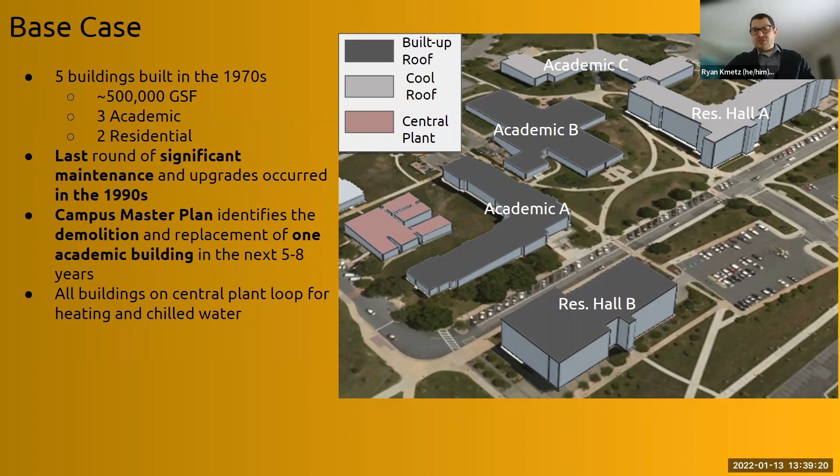All the buildings in this example are on your central plant loop for heating and chilled water. For those who don't understand what that means, the central plant has all the boilers and the giant chillers and just puts out pipes. They make a big circle and the pipes stop at every single building. That's a very simplified way to describe it.

This is where some of the sustainability folks sometimes are like, oh, I don't want to listen to this, but I'm trying to get it so that everyone kind of understands it. I understand that not all sustainability people are engineers and technically minded, but it helps if you have a little bit of interest, or at least feign some, in what the technical engineers and architects are talking about. For this example, each building has 2 air handlers per floor.

VAVs - if you are just starting in sustainability, VAV is variable air volume, it's a way you manage your HVAC. Hot water reheat is once again an HVAC term. Look these things up, it's good to get to know what they mean, so that when you're in a meeting and you hear 'oh, we installed new VAVs,' you're not like, what?

Interior lighting, I have mostly Super T8s - those are the tube lights, they're fluorescents. Back in the late 90s, early aughts, everything was moving from T12s to T8s or Super T8s, and then they went to T5s. Now today you see a lot of folks installing LEDs. Exterior lighting or metal halides, if you don't know what that is, they're usually pretty big light bulbs, usually what you'll see in a parking lot at night.

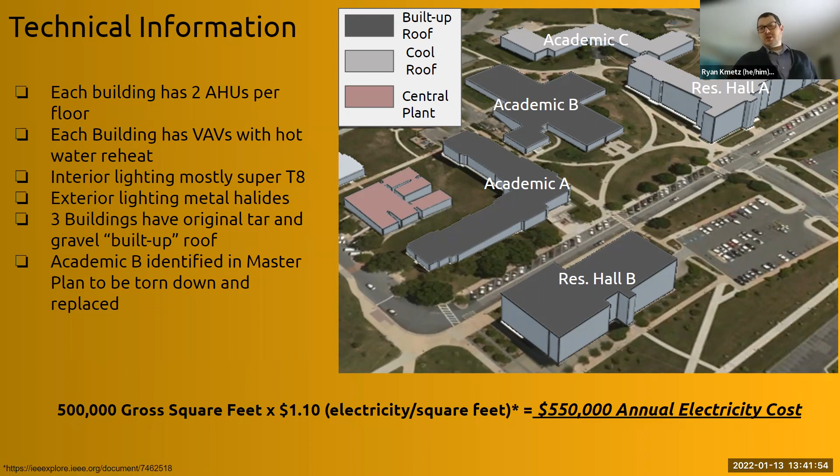Just so we have a general idea of what we're talking about, remember 500,000 square feet at approximately $1.10 for your electricity. So your annual electricity cost is just over $500,000. And you'll see why that's important.

So the EIA is the Energy Information Administration. Every so often — I think it's actually due this year, the update, every 10 years — they will do a national assessment to profile buildings.

Since the majority of folks on this call are coming from universities, we're in the commercial building sector, not residential. EIA broke down in 2012 exactly where energy is going at buildings. What's really important to take away is 25% of your typical building's energy consumption is actually coming from space heating. Lighting in 2012 was 10%. My guess is if we did this today, lighting would be closer to 7 or 8%, just because LEDs have become so adopted since then.

But you'll notice you have ventilation, cooling, refrigeration — all of these things are systems either within the building or in your plant that there might be some opportunities to discover some low-hanging fruit to increase efficiency.

So if you're a newer sustainability person on the call, you're probably thinking, what does that matter? Well, if we can measure what we're using and use it as efficiently as possible, we're going to use less energy, and less energy hopefully translates to less emissions — unless you do something crazy and turn your lights on 24/7. But what we're trying to do is think in a system and think of cause and effect and how it's going to relate.

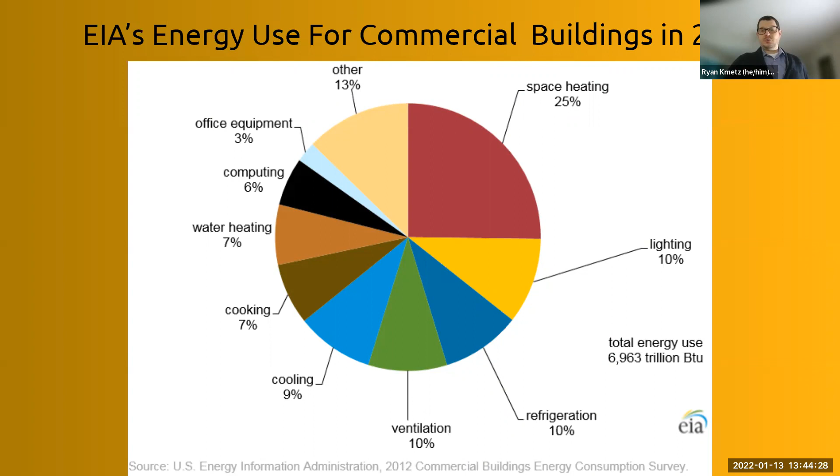So deferred maintenance — I'm sure most people on the call have heard about it. To put it very simply, it's money that you didn't spend and you put off fixing something. I won't read the definitions to everybody, but in the facilities world there's the APPA organization, and all the facilities folks will be very familiar with APPA.

And in sustainability, as everybody on the call knows, there's lots of different resources there. I actually pulled that definition out of the U.S. Geological Survey's federal manual for deferred maintenance, and I just wanted to illustrate what it is.

So you'll see on the top picture, there's two windows — just before and after shots. You'll see the one window is probably single pane glass, definitely a wood sash around it. The paint's peeling. Unfortunately the picture's not too good, but if it has like alligator scales on it, it's lead paint.

And then you'll see on the after picture, you have a nice brand new window. It's probably vinyl — I bet you it's double paned, or if efficiency is a really important thing at that institution, it's triple paned. And the glass also has something called an emissivity factor, so you might have heard of a low E window. So you went from windows that probably didn't have that to windows that now do.

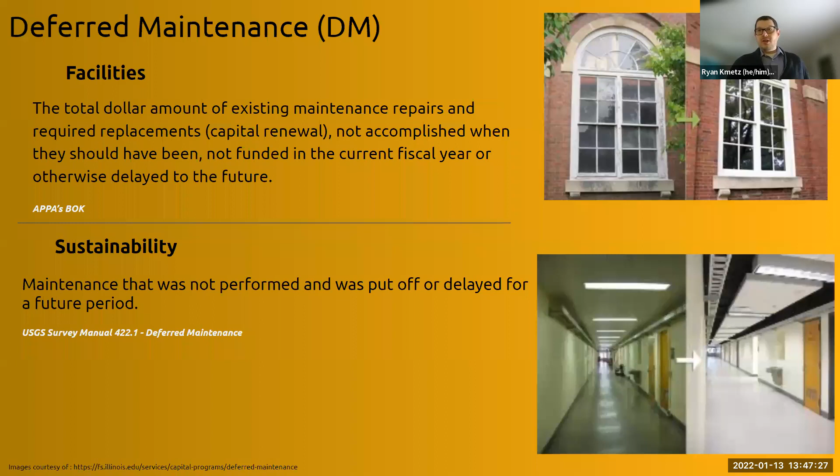So when we talk about deferred maintenance, it's typically stuff that isn't a disaster if it doesn't get fixed, but needs to eventually be fixed. Lots of times you think of the building envelope, so your windows, your doors, or even pipes coming in and out of buildings, usually with little gaskets or foam around them. That stuff breaks down over time.

Roofing systems, it's going to depend on how long. Different roof types have different life cycles. Everybody's familiar with house shingles - your average house shingle, an asphalt shingle, is about 20 to 25 years. But for those who grew up in the Midwest or more rural areas, you probably know houses with metal roofs, and those are typically 50 to 75 years. Then you can go to Europe to the extreme - clay roofs, which in some cases were put up in the 1600s and are still there today, functioning just the way they should.

For HVAC, that's your fans, your pumps, your sensors, and then lighting - it's fixtures, just where you put the light bulb, and controls can be as simple as a light switch or as complex as a controller that will dim the lights to a certain level at a certain time, depending on if it feels or sees somebody's motion.

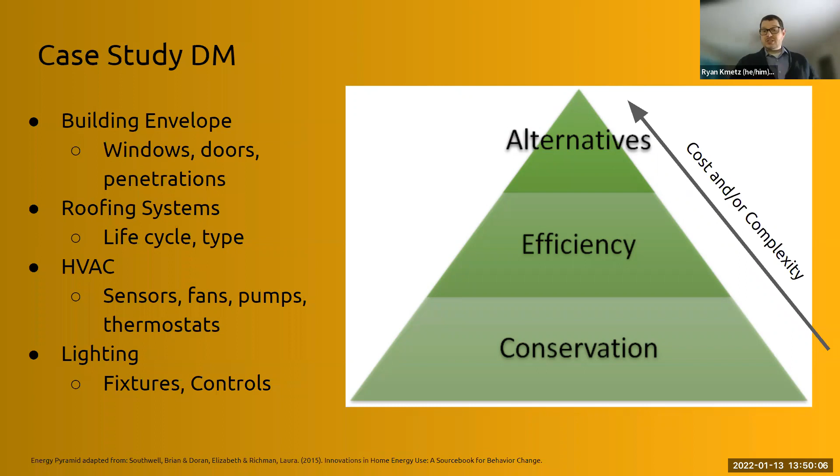So once again, back to our cool little example here - what I want to do is show everybody some projects that every campus deals with on a regular basis. ECM is an energy conservation measure, and roof replacement really isn't an ECM, but it just made the chart look nicer. The X's indicate some of the examples here - our X's mean that we did it. In this case, we did 4 buildings with LED retrofits.

Once again, this is fictitious - 4 buildings with HVAC. Only the residential buildings got building envelope treatment, and roof replacement was needed on 2 of the buildings. Then I extrapolated out total costs, based on kind of national averages, and the savings. As you can see, the LEDs pay for themselves really fast, whereas stuff like roof replacement doesn't pay for itself super fast, but it's usually something that's needed. Envelope is almost always going to be a loser, just because it's a slow payback.

But in some cases, like the lead paint example, you're able to remove an environmental hazard and make it look better. And if they're your flagship res halls, that's very important when you have students and their families touring through. So I just wanted to give that example. And you're probably like, why is the one building, building B, nothing in academic building B, nothing's happening?

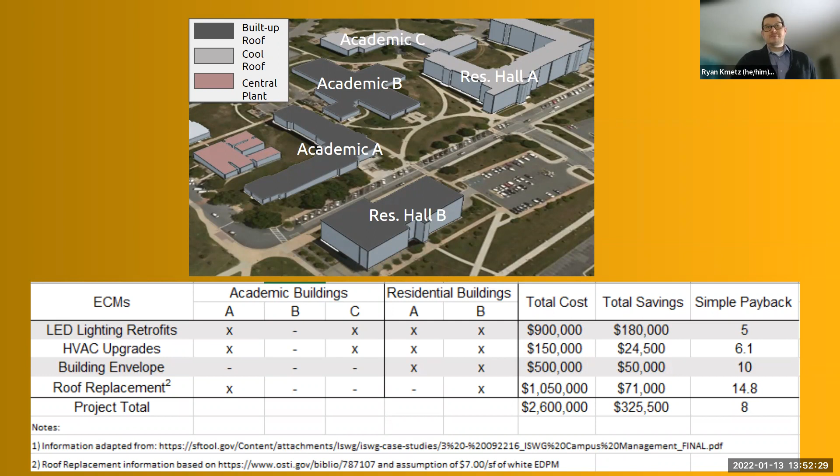So now I would like to talk about the total cost of ownership. From a facilities point of view, that's essentially how much money do we need to design it, operate it, build it, replace it, and eventually get rid of it.

In the sustainability world, it's really thinking of everything as a resource for something else. So you think about how this can be repurposed, reused, or safely disassembled. That might be looking at a wood structure or low VOC paints and adhesives. A lot of what LEED is trying to look at is trying to get to that sustainability thought process.

So there's that big cost at first to build it, then you pay money to keep it running. Utilities, you have to have gas and electricity. Renewal, in this case, think of that deferred maintenance idea.

That's every once in a while you got to go in and fix it, just like your car. Every once in a while you have to change the oil, change out the spark plugs. If you have an electric vehicle, I don't have one, so I don't know what the recommended maintenance is, but I guarantee you there is some, like your brakes, for instance.

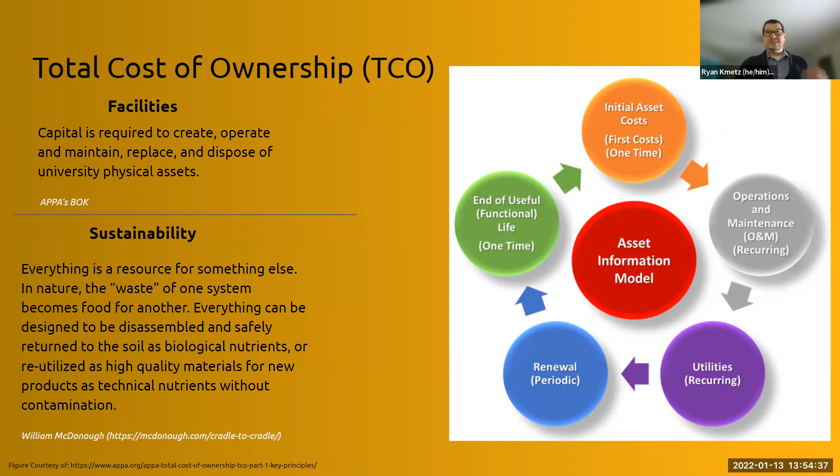And then at the end of it, how do you properly dispose of it? Going back to that car example, if the car is steel, the steel can be recycled. What do we do with those lithium ion batteries for electric vehicles? What do we do with the lead acid batteries for traditional vehicles? And are there alternatives that are nicer to the environment, so to speak?

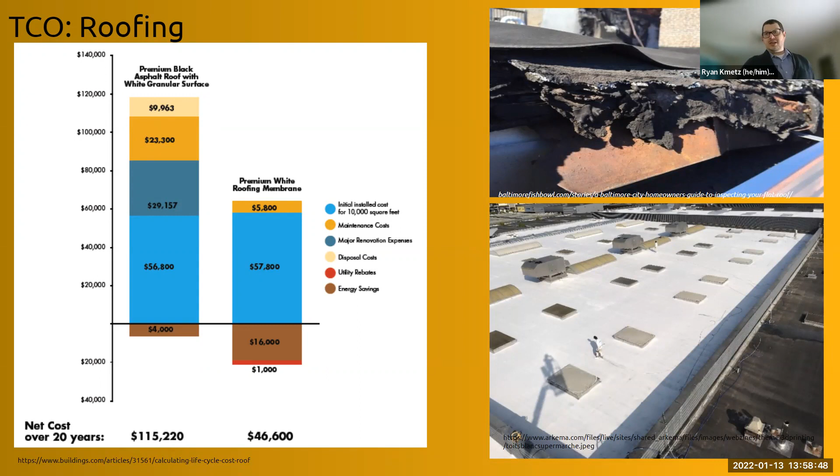So that's why that delta in cost is so huge. Once again, this is kind of a national average, and this does not speak necessarily for your building, because I know somebody probably on the call has an example where it's actually the inverse. But this is a general kind of idea and study. And as everybody knows, when we come up with theoretical ideas, there's always an anomaly.

So project scope. Most of us probably know what scope means. It's basically, what are you going to do in a project? What's the amount of time that you say the project's going to be done? And what's the quality? So milestones and phases.

From the sustainability perspective, it's actually expanding that definition and going just from talking about, okay, I know that I have to have this building built by 2023, which means in February, we need to pour the foundation. By July, we need to be starting to install interior stuff. By November, we need to start getting ready for commissioning the building, which means making sure all the systems are working properly and people can move in.

But from a sustainability perspective, it's also talking about, okay, what can we do to reduce all the various impacts associated with the project? Are there opportunities to reuse stuff on site that now we don't have to necessarily send it to the landfill, or dispose of it?

A great example of that we've used at my university at UMBC is we recently put in some new power feeders through the heart of campus, and a lot of it had to go under walkways. So we were actually able to, it was a little more time intensive, but we pulled off all the brick pavers so that we could do the trenching and put in the new feeders. And I'd say about 75% of the brick pavers were able to be reused. Some broke, some didn't make it, but we thought about kind of what the impact was.

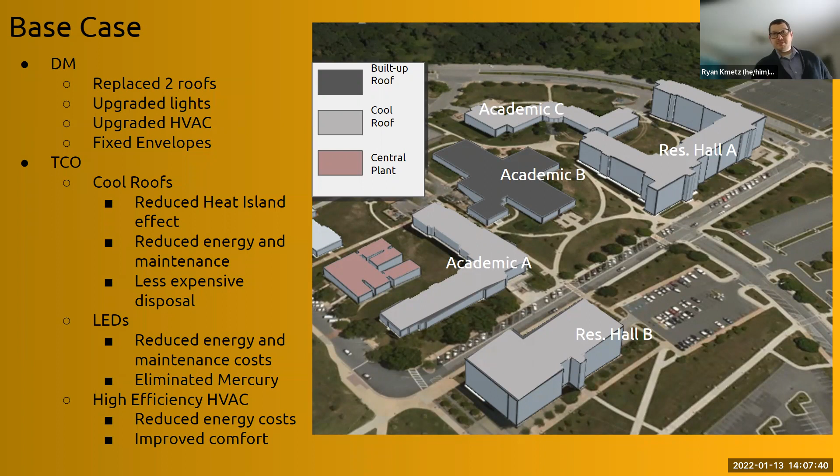And then high efficiency HVAC: you get improved comfort, you've reduced the energy costs. And if you can have happy students and professors while also using less energy and putting out less emissions, it's a win-win for everybody.

So in this base case, I tried to hammer home that example of thinking about future plans and usage. Because remember, we have that academic building B where we didn't do much to it because it's eventually going away. So we tried to account for what the future might look like, and what's going to happen when the roof needs to be replaced at those new buildings that got the white roofs or cool roofs.

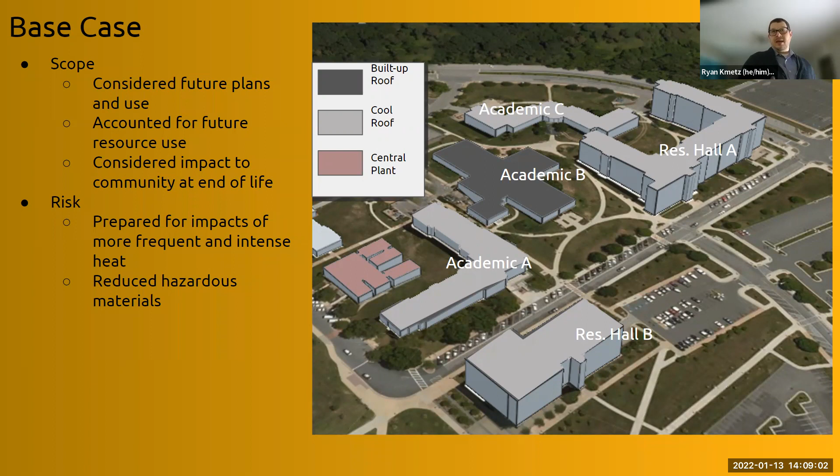And then the risk is preparing for the impacts of more frequent and intense heat. So that's primarily the roofs, but if all your chillers and HVAC equipment are working to the best of their ability efficiently, hopefully you can maybe buy yourself a little extra time if you're in a brownout and get a little more out of your gen sets. And then that reduction of hazardous materials, whether that be the mercury in the lights or lead paint, or lead in pipes, or asbestos—all those things—just trying to think about the immediate impact and then the overall impact years down the road and beyond just the boundary of one's campus.

So as promised, I would like to quickly go through a real life example of sustainability and facilities folks, and actually some faculty as well, teaming up in the Baltimore area.

Last year, Maryland passed a House bill, an organics waste ban, which requires certain institutions, including universities, that have 2 tons or more of organic waste a week, to no longer send it to the landfill. It has to go to an organic waste recovery facility, which could be an anaerobic digester or a compost facility.

Right now in the state of Maryland, only 5 facilities are in operation that'll take food waste, and if I remember correctly, 3 of them are limited to residents of that county. At UMBC, we send ours approximately 47 miles away, because that's the nearest location for organic waste. Other folks in the area actually have to send theirs to Delaware, because there's no organic waste facility in Baltimore, and nothing close.

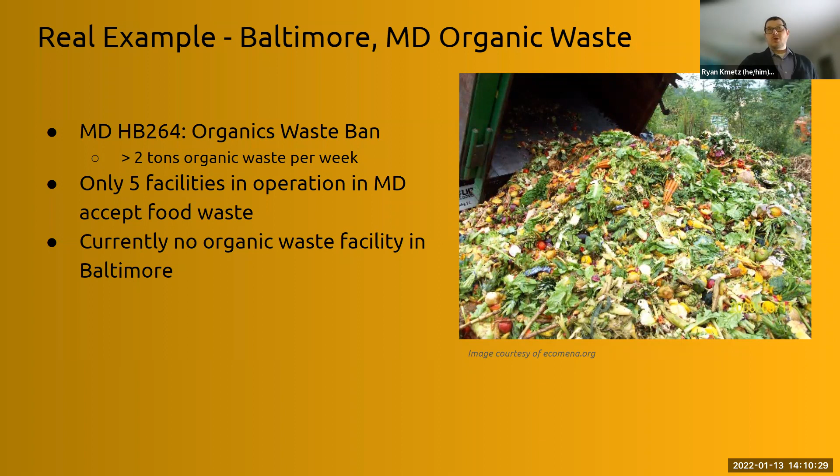So what we have in Baltimore, we're actually very lucky. We have this thing called Baltimore College Town, and there are several institutions of higher education in the Baltimore area, and they each have little subgroups. For the sustainability subgroup, it's called Because - just a play on words.

For those not familiar, you have a couple of University of Maryland campuses, Johns Hopkins, Loyola, Towson, and I don't even know off the top of my head how many different community colleges, but you have county and Baltimore City community colleges. We also have a teaching medical hospital, so we have a lot of higher education in this area.

So we all got together, the sustainability people and the facilities people, and we quantified what our organic waste was. We're not all doing it at the same rate. At UMBC we do pretty much back of the house composting, with a little opportunity for post-consumer composting. Some of the other universities have compost in every building, and even their outdoor receptacles have an opportunity for organic waste. So it's really about understanding what everybody's doing.